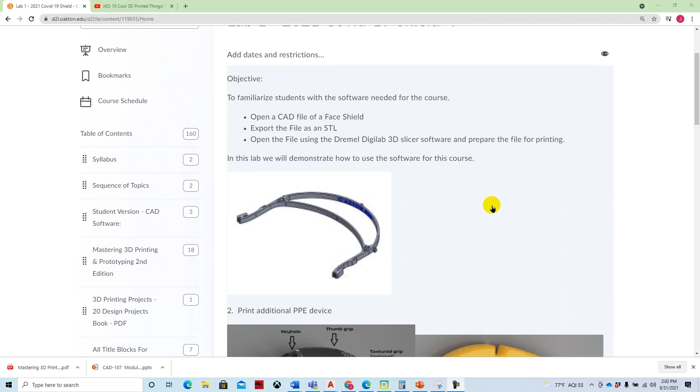Hi, Joe Cirone. Today I'm going to show you how we'll use AutoCAD to open a file and export it into a program we can use to slice the CAD file and prepare it for 3D printing.

We'll be using these Bosch Dremel 3D printers, and here's an example of the printer we'll be using, the 3D45. It's basically enclosed, has an RFID reader which automatically detects what type of material we're using, gives us feedback on what we're printing, and lets us navigate the printer settings with this LCD panel. It has a single head extruder, a platen, and also Wi-Fi, Ethernet, and a USB port.

There are a number of ways we can print with the 3D45s. For this exercise, we're going to show you how to save it to a USB file that we can then insert into the machine. They do have applications for cloud-based printing where we can remotely turn these on, but due to some IT issues we're not able to do that at this time, so we'll be turning these files in through the D2L course management system.

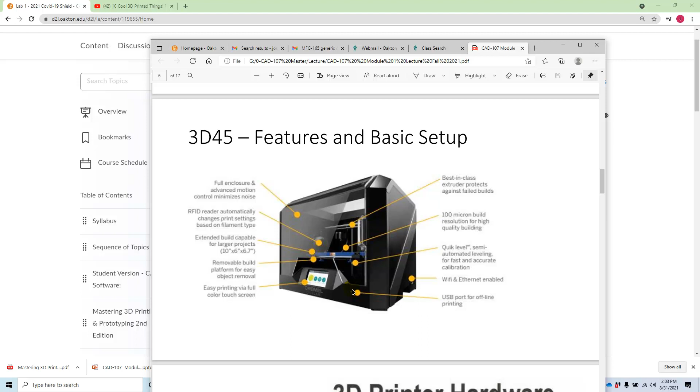Lab 1 has a COVID face shield that was designed by Daniel Lawrence, an instructor in the engineering graphics area. Here's the file that we will use for that.

We're going to open this file with AutoCAD. I'm going to click here and say download. We'll download the shield. You will need to have AutoCAD installed on your system, and we've already gone through how to do that. If you have any difficulty, you can instant message and we can walk you through the process. But for this lab, we'll figure that you have the software installed.

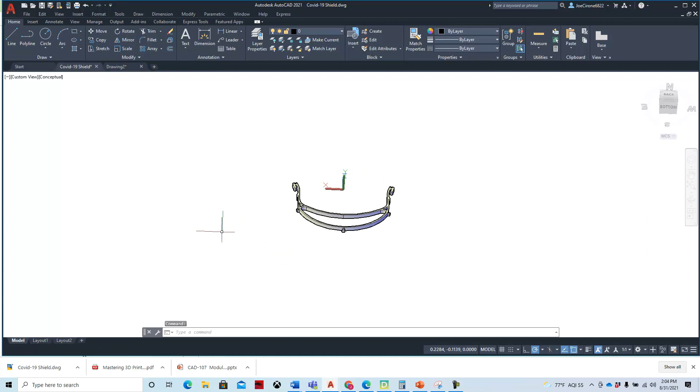So here's my AutoCAD software. If I take a look at the drawing, I already have one open, and I can open another one. I'm going to open the one I just downloaded, going to my downloads, and see how it looks when I bring it in as a student. It comes in pretty much the same.

As we look at things with AutoCAD, we want to familiarize ourselves with the user interface. AutoCAD has this ribbon across the top with different commands. We have our home screen with draw commands, modify, annotate, layers, and a number of other things, plus other tabs: insert, annotate, view, manage. For this exercise we're just going to look at navigation—how we zoom, pan, and move around the drawing once we have a drawing file.

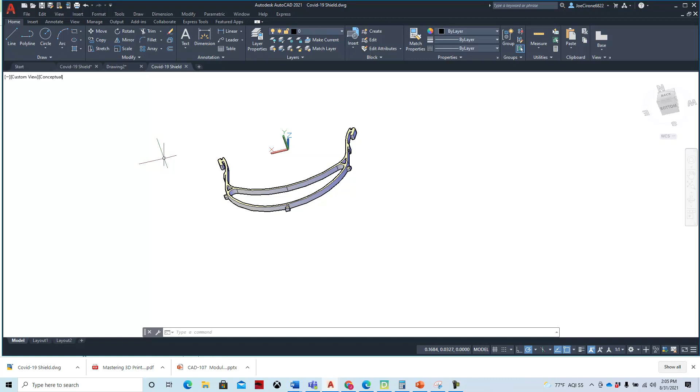So we have this face shield. If I turn the wheel on the mouse, I can change the navigation or magnification level. If I push the wheel on the mouse, I can move around and take a look at the geometry. If I hold the shift key and push the wheel on the mouse, I can orbit the part.

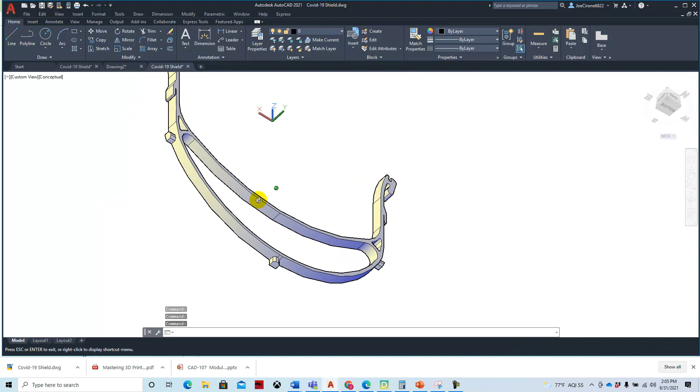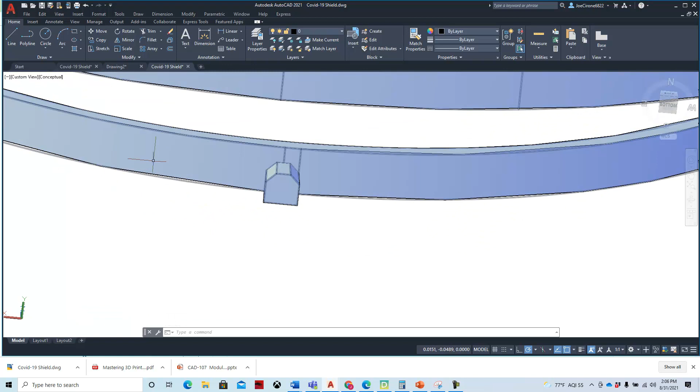By holding shift and dragging the cursor, I can see—oh, it's kind of neat, it's got my oakton.edu, so it has a stamp on it. If I let go of the shift key and the middle mouse wheel, I can take a look at some of the geometry here. If I push the wheel on the mouse, I can walk around it.

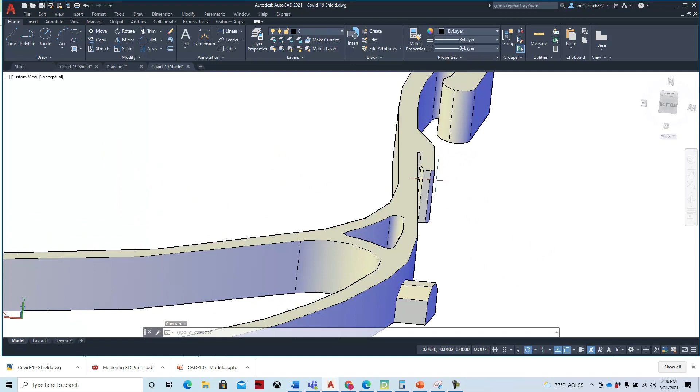I can see there are these tabs, and these tabs are going to be used to hold the plastic shield in place. There's also this little slot here which will hold the edges of the shield. The shield will basically wrap around the front, then tuck into this other slot and be held in place by these tabs.

If I want to see how the tabs look, I can navigate my way around through it. Students can also take these parts and, if they want, add something here, maybe a piece of foam to make it more comfortable. But it doesn't print foam, so we just have the basic geometry of the part.

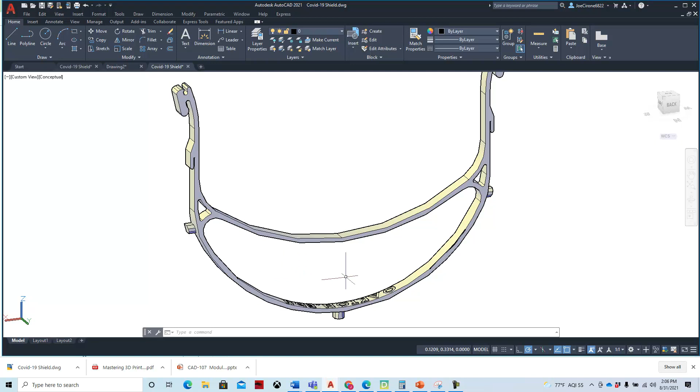Once I've looked at the part and I'm happy with what I'm going to print, I'm going to export this as an STL file. STL files are the files read by our slicing software, which is the DigiLab 3D printing software.

So what I'm going to do is go to File and export it. I'll hit this big red A, hit Export, and select Other File Formats, and I'm going to export the file as a lithography or STL file.

You're going to want to keep an eye on where you download or export this file. I'm going to export it to my hard drive. I have a portable hard drive set up for this class, and I want students to put their initials on the file.

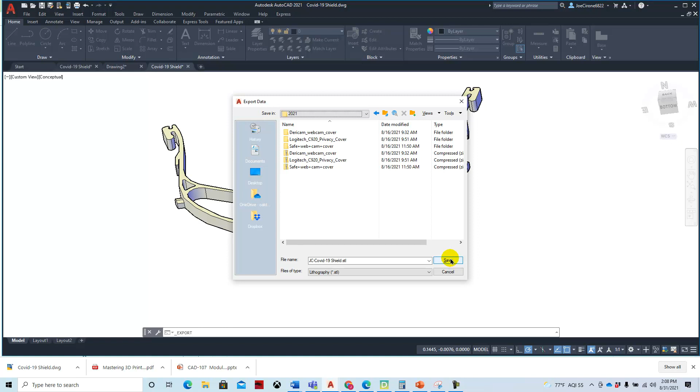I'll name it JC-COVID-19 Shield STL, and it's going to go to this location on my portable drive. I'll hit save, and it's asking me to select solids or watertight meshes. This is a solid model, meaning it has volume, so we can slice it and work with it in 3D printing.

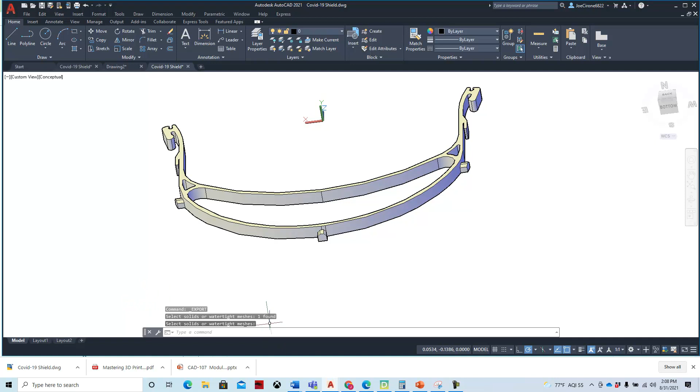I'll select this and hit enter. Once I've done that, it says it found it and created the file. I can take a look for it by going into File Explorer, and then I can go to my drive and see where my STL file is.

So if I take a look here, here's my STL file right here. And what we're going to do is open that file with our DigiLab Slicer.

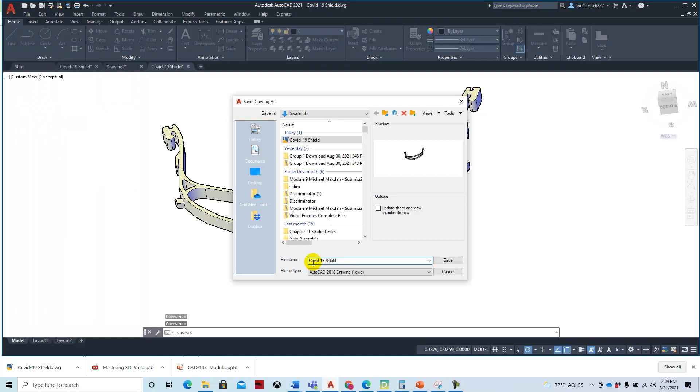This file right here we can save as, and we can save it also with our initials. We're really not doing anything other than putting it in your local drive, so I'm going to save this also to that same directory.

This will save as an AutoCAD file. There are different file formats that we're going to work with—this is a DWG file format, or a drawing file format.

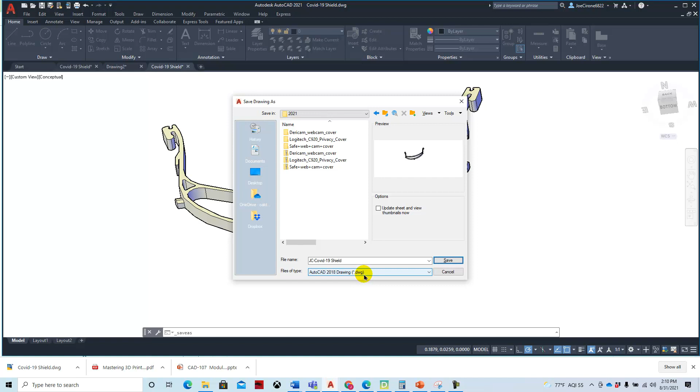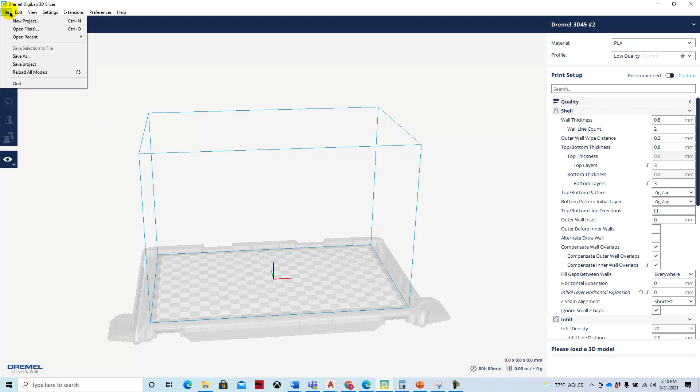Then we're going to open up our slicing software. The slicing software we're going to use is the Dremel DigiLab slicing software, and it's configured for our 3D printers. So what we'll do next is open that STL file by saying File, Open File, and navigate over to that.

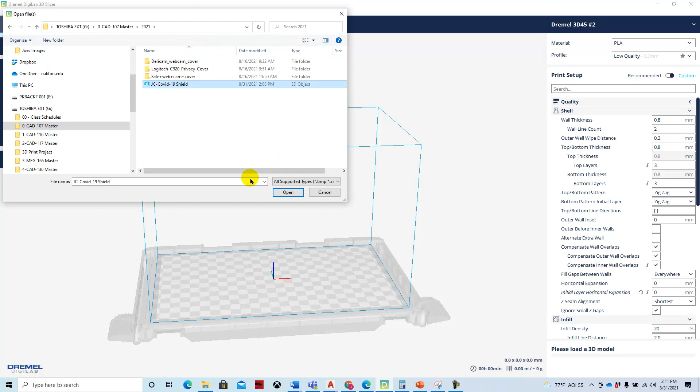I'm going to locate the file and open it. So here's our file, and the navigation on this works a little differently.

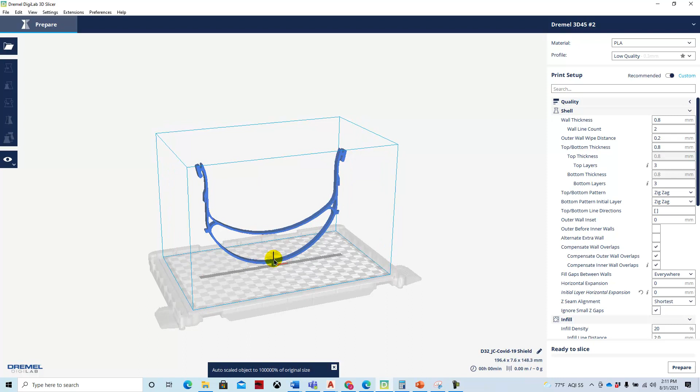If I turn the wheel on the mouse, we can notice that this will increase and decrease the size. If I push the left wheel of the mouse, it doesn't do anything. If I push the right wheel of the mouse, it will rotate. You can see that it's put it into the build area, and this is the platen of the build plate for the 3D 45.

We take these out and prepare them for printing, and then the interface shows us that we can select materials, quality levels, and all these different settings for being able to print a file. What I'm going to do is orientate it in a manner that it will properly 3D print.

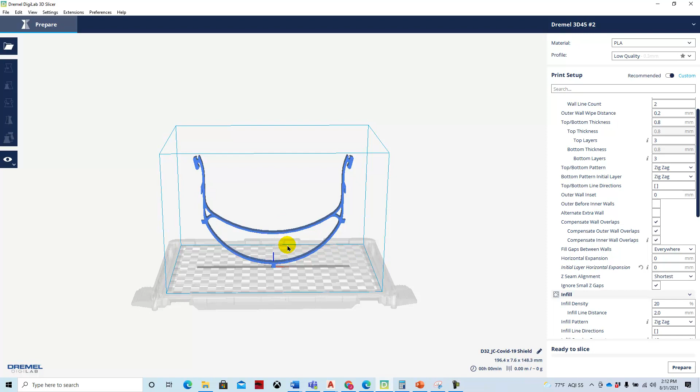As it prints, it will print this little piece here and then keep going up in the Z-axis, and it can't print over air. So what we want to do is flatten this out or rotate it. We'll click on that, select the rotate command, grab this, and drop it over 90 degrees.

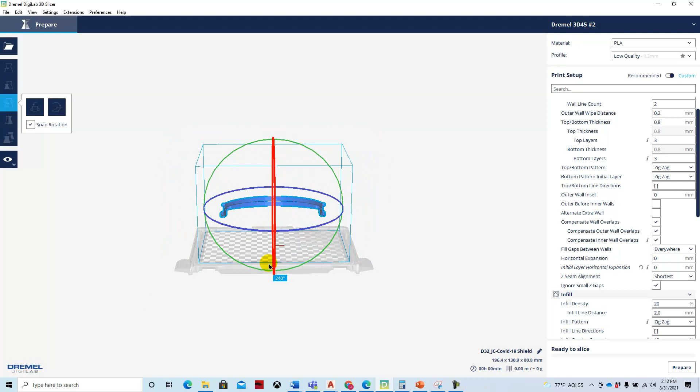Once it's on the ground there, we can then check to see if it's going to fit on the build plate. And it appears to have a little bit of interference because it is checkered.

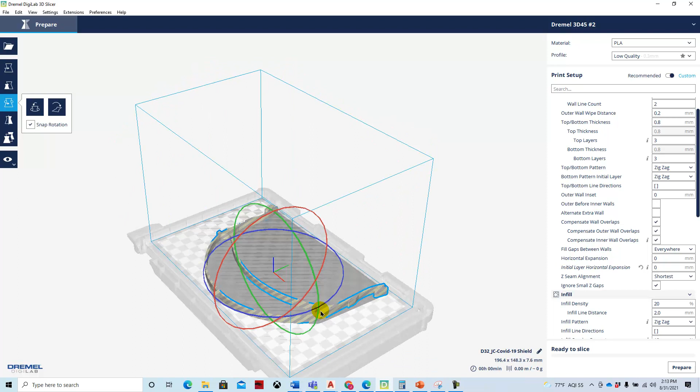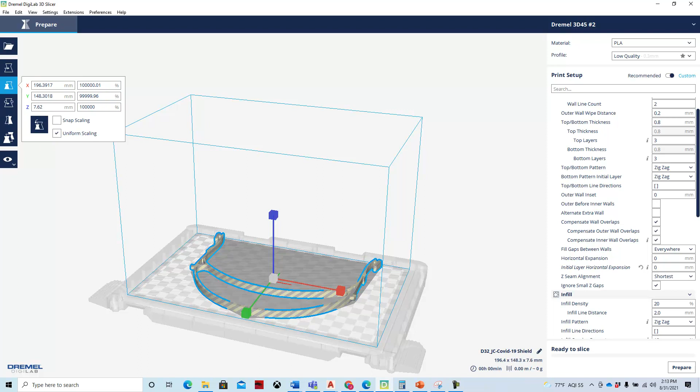So I'm going to bring this down slightly and scale it by 95%. We can undo that and scale it instead—we're going to scale this down to 190 millimeters. That's just enough that it will fit onto the 3D printer platen.

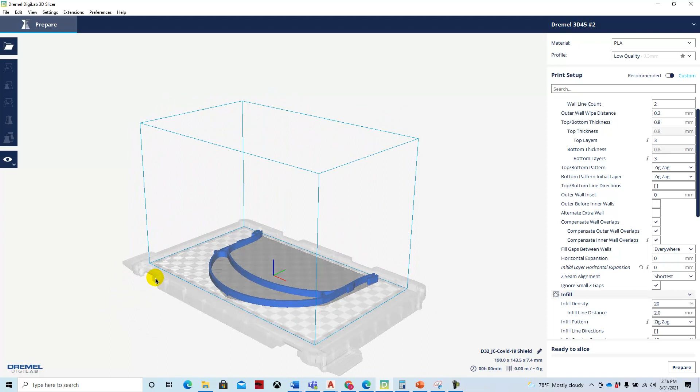Once we've done that, we're going to take a look at some of the slicing tools. We're going to set this up for PLA, so our material here is going to be this Dremel PLA, which is polylactic acid—we'll go through some of the materials in the readings. We'll also be able to set up the slicing settings, and for this we'll build it in 0.3 millimeter layers.

As it slices it, it will slice it in this increment. The higher the quality, the more fine the slicing is. For this exercise, we're just going to go with a low quality and take a look at what we get with it. We can take a look at some of these other infill and material specs by expanding and unexpanding some of these areas.

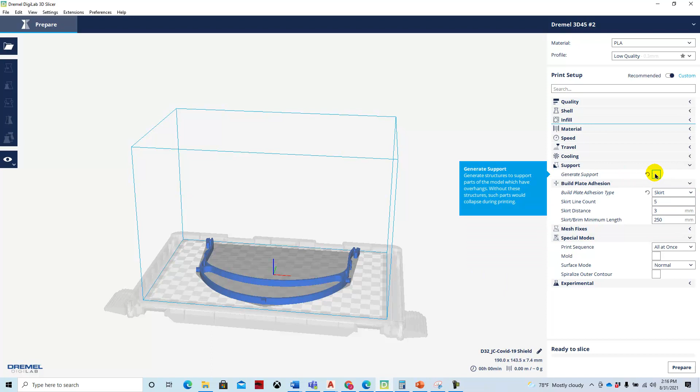For the most part, we're just going to look at our build plate adhesion. We're going to use this as a skirt, and we're going to enable support material. By generating support, that means there will be a little bit of area underneath the part that will allow us to take a look at it.

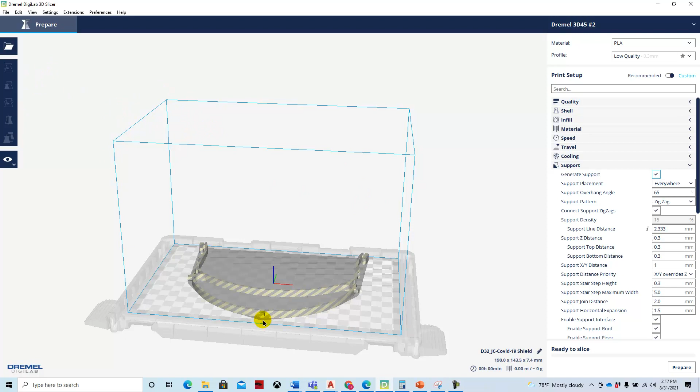Now, when I set it up to generate support, it looks like I'm going to have to make it a little bit smaller. So I'm going to go back and click on it, and bring this down to 185 millimeters.

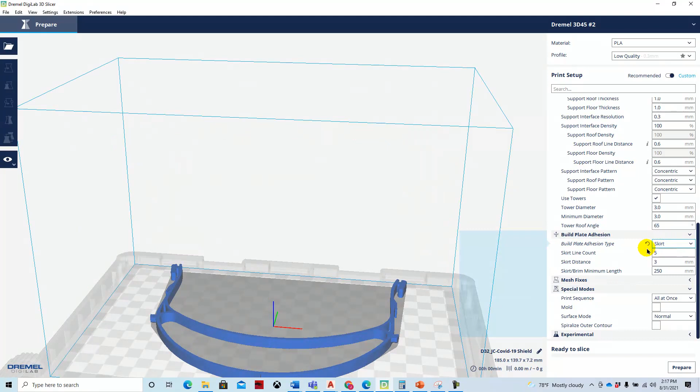Okay, so there we go. Now as we go through and work with this, we can have it generate the support material required for this. We'll look at the build plate adhesion, which is going to allow it to hold it to the plate. That's pretty good for right now. We don't necessarily need to go through anything but the defaults.

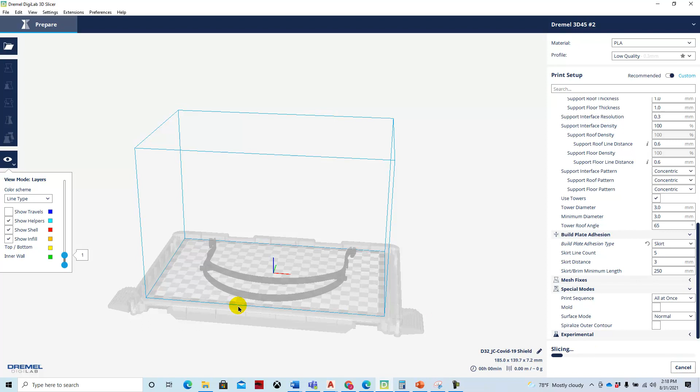We're going to switch over to the view mode and look at the layers. We'll switch over to the layers, and then we'll hit the prepare button. That will prepare it, and I'll push the middle mouse wheel, and if I turn it, I can see how this is set up.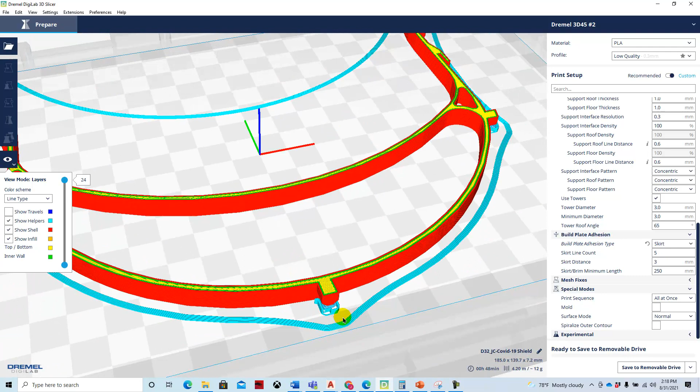When I had the build plate adhesion set for skirt, you can see it sticks out here a little bit. You can also see how the layers are going to be supported. This is our support material, because it can't print in the air—technically it can do some air printing, called bridging. Then it's going to print it in 24 layers.

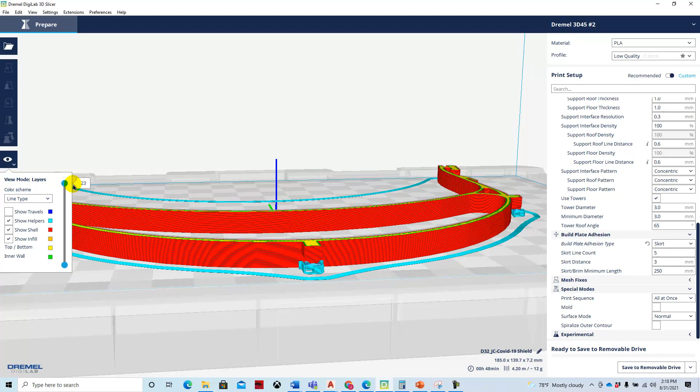So we can come down and look at how each of those layers is built, then come back up and take a look at it. Everything looks decent, so what we'll do is save this to our removable drive.

And then I can take that drive, eject it, and put it into the 3D printer. That ends how to take the software and open the file in AutoCAD, bring it into the slicer, and prepare it for printing.

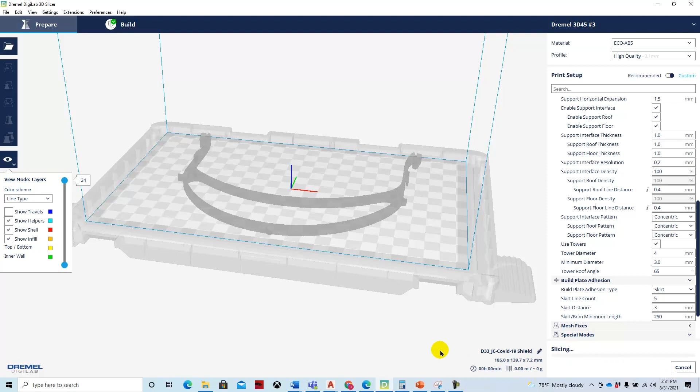Resuming. Okay, so I was able to get a network connection to my Dremel 3D45. As you recall, we prepared this by going through and setting up our slicing options. So now it's ready to print over the network.

If we want to verify our slicing, we can come over here and go through the slices. Now this one has got a lot more layers, so I noticed it's got a high quality setting. I'm going to dial that back down to a 0.3 millimeter and then re-slice it.

Once we have sliced it, it will give us this information as far as how long it will take and the file name it's going to use. If we were to save this to a USB, we could save it to a removable drive. But if we print it over the network, there's no need for that—it'll just go directly over the internet.

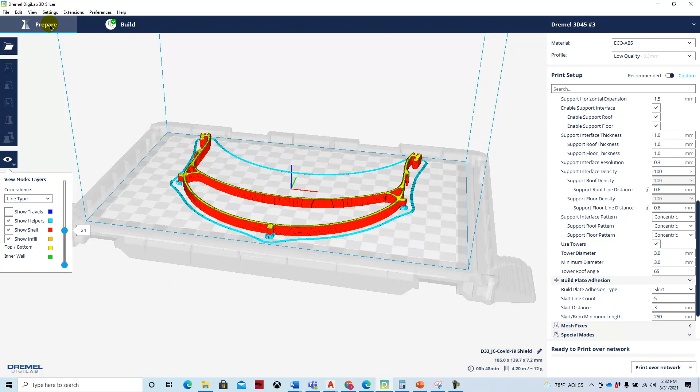And so when we're connected over the internet, we'll see our 3D printer. They have cameras built into them, so we can see this is the filament and this is our build plate. We'll come back to our prepare button and then click on print over network.

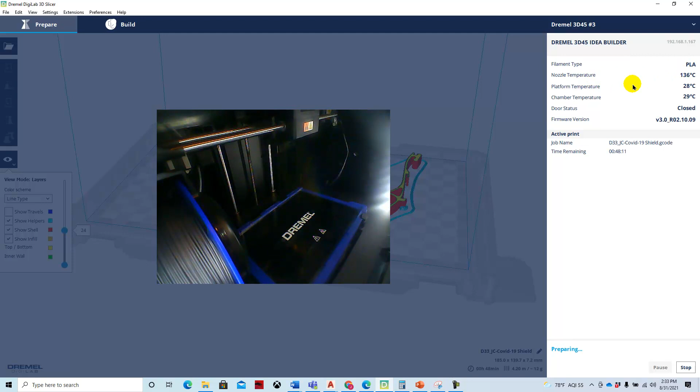So it'll send that file over to the printer, and then it will start to warm up the nozzle and bring the platen, or the build plate, up. This little sensor here will check the level of the build plate.

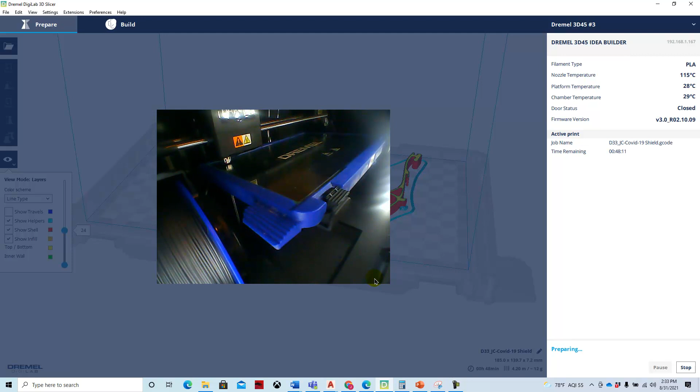It'll take, I believe, three measurements to make sure that the plate is perfectly flat. Because if the plate isn't perfectly flat, then the layers won't be properly aligned—it will be crooked.

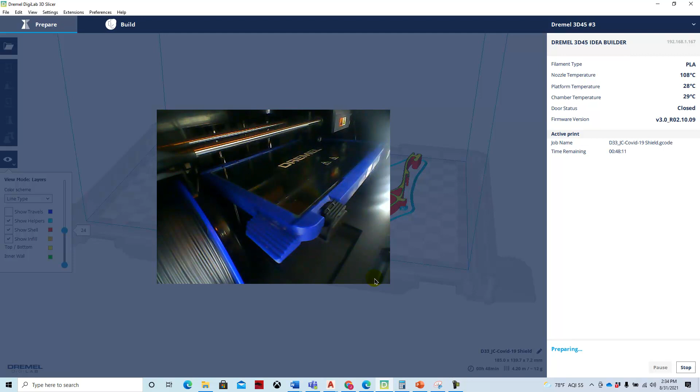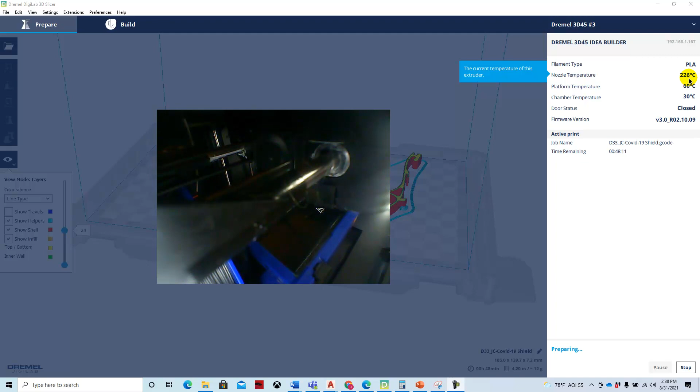So once it's taken the readings, it will heat the filament nozzles up to temperature. We're waiting for the nozzle temperature to get to 230 degrees Celsius. Once it gets to 230 degrees Celsius, it will begin printing. And so the platen is raising, or the build plate.

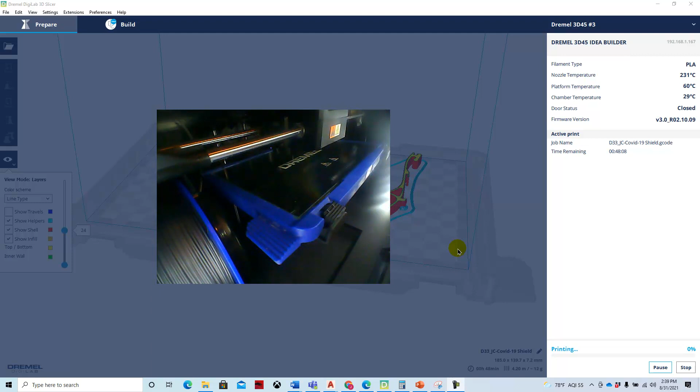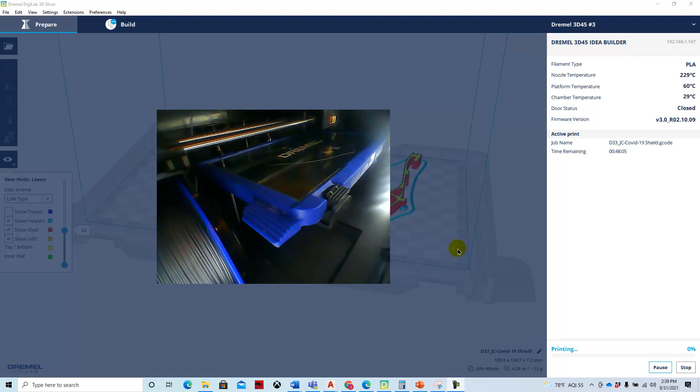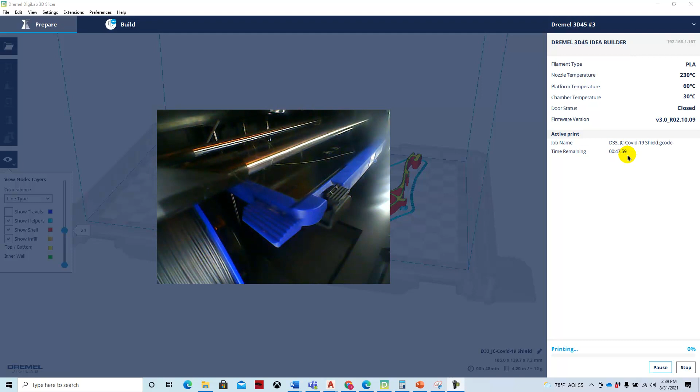And it's now extruding the first layer. You want to check for good build plate adhesion for the first layer, because it's the foundation for all the rest of the build. We'll come back and check on this. We can see the time remaining is 47 minutes and 59 seconds.

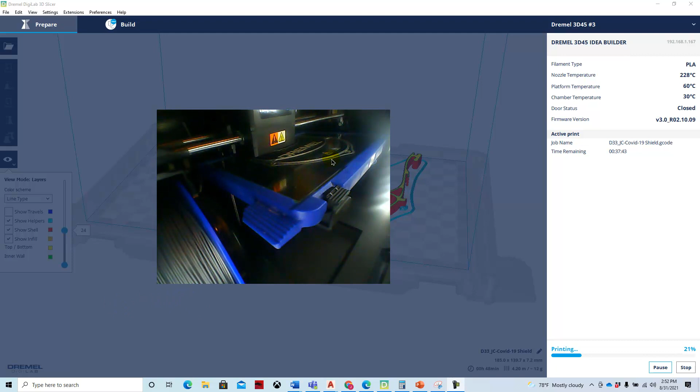Okay, so as we can see, we're 3D printing our COVID face shield, and this completes lab number 1.